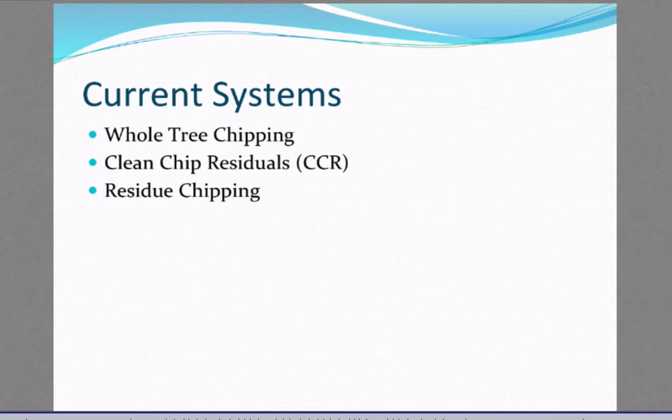For those that are in the forestry end of things, this is going to be a lot of review, but this is kind of what I thought we could review on and discuss where we might go from here. So first I wanted to talk about current systems, and there's three general areas that we think about as we produce biomass, and those three systems are what we call whole tree chipping, or at least what I call whole tree chipping. There's this area of clean chip residuals, which some people call CCR, and then there's the area of residue chipping. So we'll kind of go through each one of those.

Whole tree chipping, you know, it's been around for a long time. I want to say since the early 70s, there's been various opportunities of whole tree chipping out there. Most of them are large independent operations. Most of the time they're dealing with small diameter material. They were originally used for land clearing, and then the diameter was up and down depending on what the material started out as. But now they've kind of progressed to where, especially as it relates to biomass, they're small diameter material. They're usually doing some kind of understory clearing.

They can be used for land clearing. I was recently down in Florida, and there was a lot of land conversion going over to farming that they were doing some land clearing on, and then you can get larger diameters. But most of the time what we're talking about is understory removal, where it's pretty small diameter material.

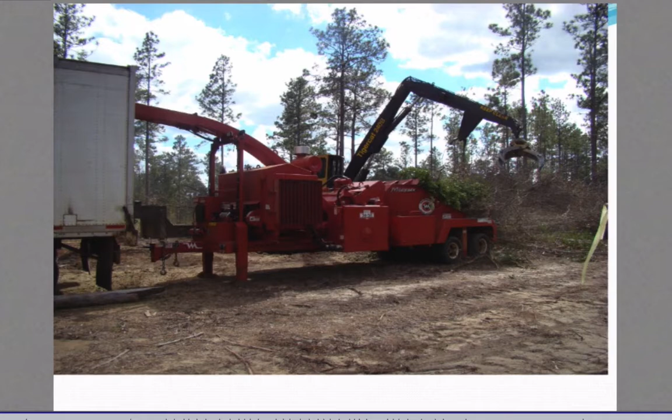Of course, there's a chipper involved, anywhere from probably 450 up to about 800 horsepower. Some of them are fed by a separate loader, which you see in the back on this one. Some of them will have a loader attached. There's lots of manufacturers out there, Morbark, Bandit, Peterson, several different manufacturers out there.

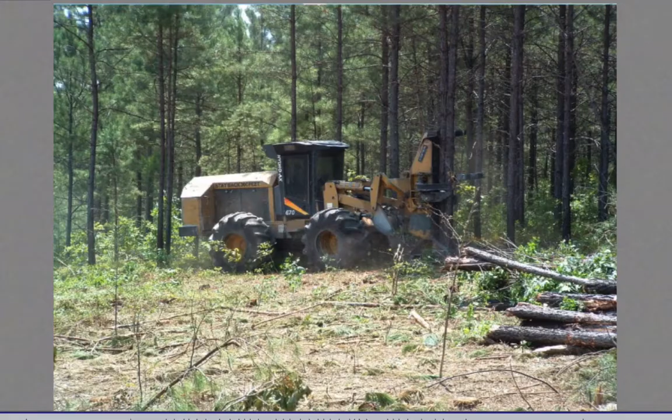Typically, the material is harvested with a wheeled feller buncher, with a saw head or a shear head on it. Very common machinery. It's been around for a long time. No surprises here. Very proven system. But a wheeled feller buncher, harvesting anywhere from 10 to 15 loads a day.

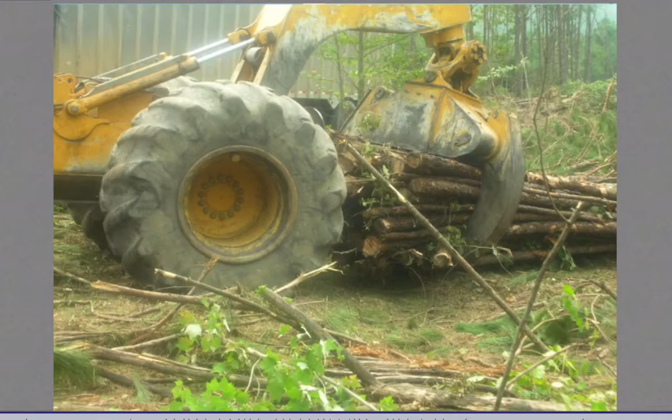Brought to the chipper via a wheeled skidder, and in terms of understory removal, you can kind of see diameters in there, anywhere from 2 to 3 inches in diameter up to about 6 or 8. Once in a while there may be a big tree for whatever reason, but lots of small stems, and then they're feeding them entirely into the chipper. In this case, this is the same operation. You can see the loader feeds them. A lot of variability in the material.

You see he's blowing it into the van. For those who may not be familiar, we call these dirty chips. It's not the fact that there is some dirt in them, only a really small quantity. They're dirty chips from the standpoint that they have not only wood, but bark, needles, leaves, whatever else.

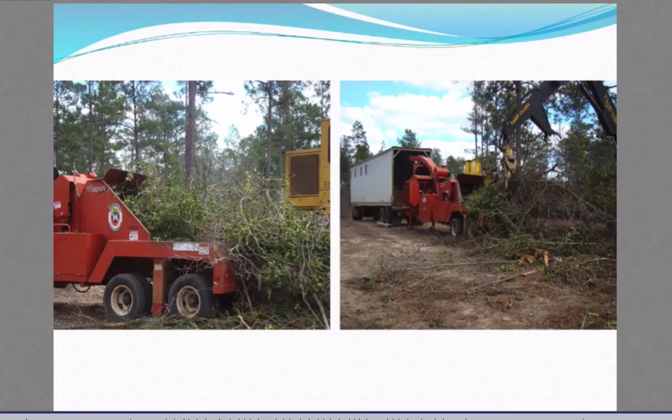As you can see from the pictures I have on right now, it can be pretty small diameter and ratty stuff, but if all it's going to do is be used for biomass, especially right now where it's just being burned, it doesn't matter what the makeup of the material is. Those are the majority of the systems out there right now. The pictures I just showed you were from various fuel operations I've seen in most of the southern states. And again, wheeled loader, regular size, conventional skidder being fed into a chipper.

We do have a project here, most of the way through right now, where we put together a dedicated system specifically to handle a large number of small stems. We consider these to be loblolly pine fuel plantations, energy plantations, grown on a 9 to 12 year rotation. Lots of stems per acre. In this case, there was about 600, but we can foresee 800 to 1,000. We put together this system.

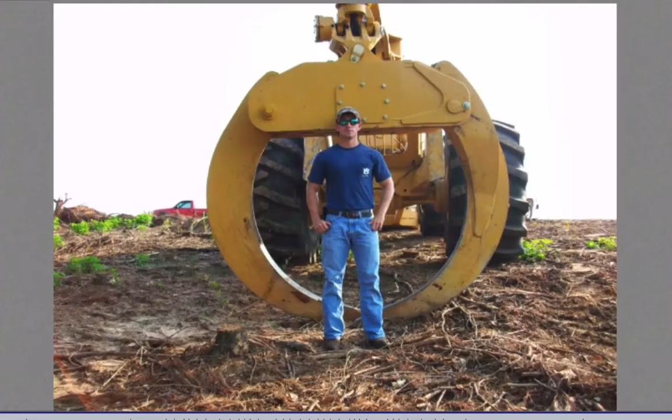It was a track machine, as you can see, a boom type machine. So instead of driving all over the stand like a wheeled machine would have to, this would reach to the different trees. The high production felling head was a shear head, capable of handling up to about 15 stems, though we found some difficulty in getting that many. Very high production system. We mated it with a fairly large size Tiger Cat skidder. This was a 630 with quite a large grapple on the back to handle the multitude of small diameter stems that would be piled by that feller buncher.

The difference between this system and the wheeled systems is that most of the wheeled systems currently out there are only handling about 10 to 14 loads a day, whereas this system, as we checked the productivity of it, if they can get the trucking to do what it's supposed to do, with just a feller buncher and one skidder, could probably produce about 20 loads a day. So it's a much more productive system, with the idea that you'd be clear cutting small diameter stems. The rest of the system is that it was put into a chipper. In this case, we were producing clean chips. But the idea behind the system originally was that it would be for producing fuel or dirty chips for the energy market.

Bottom line is all those were whole tree chipping systems. Again, they're generally large independent operations. Small diameter wood, land clearing, and understory removal. You're going to get wood, depending on if it's clean chips or dirty chips. You're looking at something that's going to be heavy to wood, probably 80% plus. And you're going to have that 7 to 9, 10% bark, and about 10% is going to be needles, foliage, anything like that. So that's whole tree chipping.

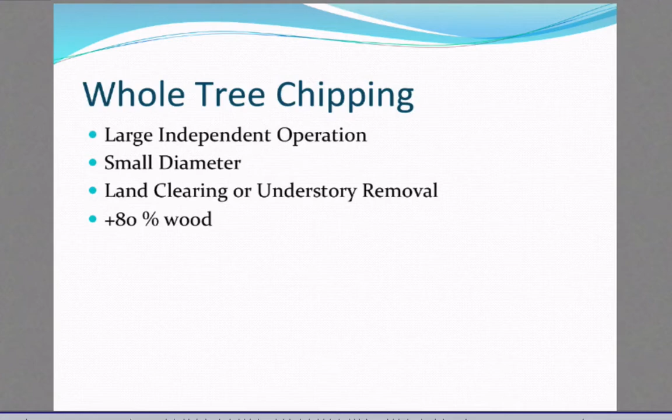The second category that I think about when I talk about biomass and fuels is clean chip residuals. It's important to understand that this is a byproduct from a clean chipping operation. So if you don't have clean chipping, you don't have any of this material, and it's almost always going to be reprocessed through a grinder, which means the quality of the actual pieces of the material is probably not going to be as good as you get from a chipper.

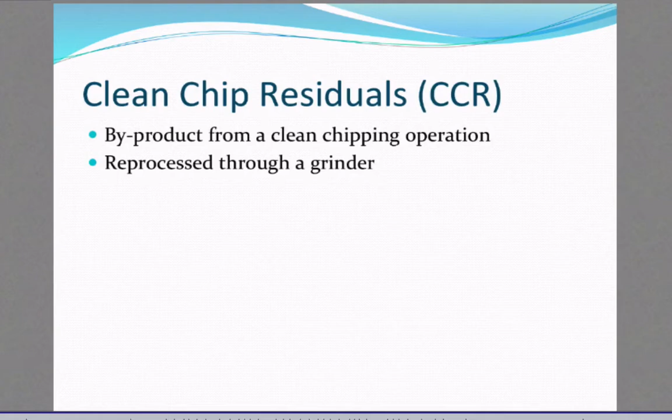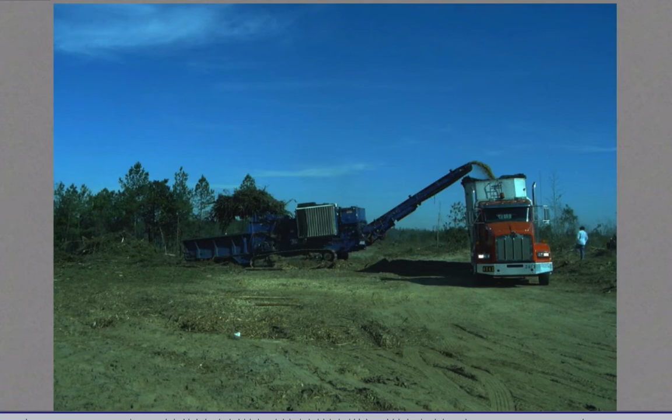The contrast isn't very good, but just in front of that front-end loader, you can see the material all kind of piled up. And then what will happen is he will grab that with his forks on the front of that front-end loader, and you can kind of see this one. He's on the back side of the machine. He's about to dump a large bucket full into the grinder, which then processes the material through and into the truck for delivery, again to the biomass plant.

The quality of this material is quite variable. It's obviously less wood and much more needles and bark. Dirt can be a problem. And that really falls back on time of the season, and also who the operator is. Some operators are very good. They make sure they don't pick stuff right off the ground. They make sure they don't push up too much stuff off the ground.

But I've heard a lot of different stories on this material. I've heard of people showing up with loads as much as 15 and 20% dirt in the material. And that's obviously going to be a serious problem down the road from these operations. Just to let you know, we're not the only ones looking at this material.

There's a nursery market. The horticulture department here has done a lot of studies on using this material to grow both annuals and perennials in the nursery business. Their source of material, which was peat out of Canada, transportation cost, the availability of it is becoming an issue. And they started doing a lot of studies here, growing material in it, and they found it extremely favorable.

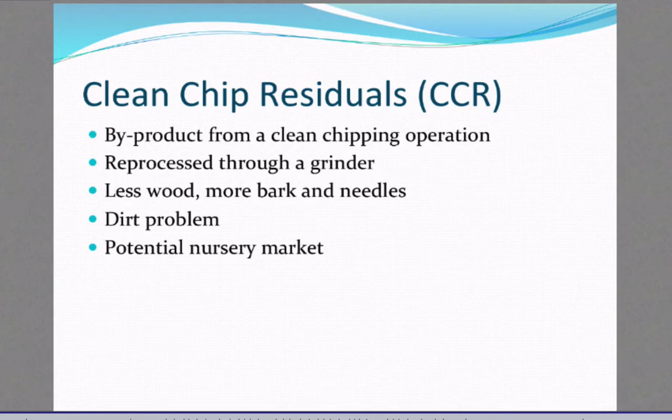The disconnect there is they don't need that much of it, and we're still kind of working through the situation on how to take it live or how to make it operational. These guys want 1 load a week, and we have operations that will produce 8 to 10 loads a day. But again, it's all ground, so you get a lot of variability in the material, not as much wood, much more needles and bark, and that's going to impact the ability to process the stuff.

The third category you hear a lot about is what I call residue chipping, and that's the byproduct of roundwood harvesting. Everyone's been past a logging job and seen that big pile of tops and limbs, and some loggers do a pretty good job carrying it back to the woods just to spread it. Some carry it back to the woods to put it in the skid trail to reduce compaction and fill in wet spots and things like that.

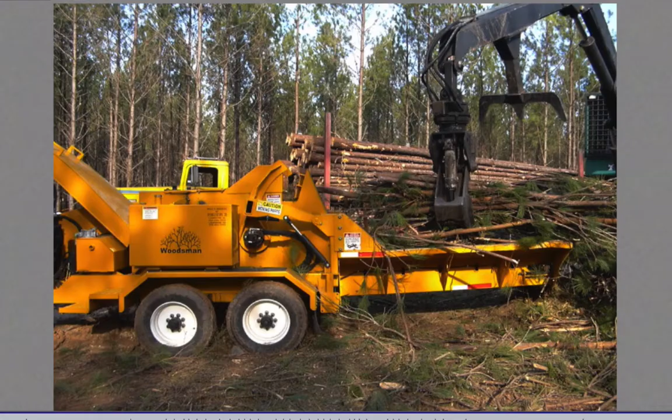But the important thing about residue chipping is that you understand that it is a byproduct of harvesting. So you've got to have those operations before you're going to get any of this material. It's typically low volume. An example of that is this was an operation not far from here. He used 1 loader and he'd fill a truck up, as you can see in the back, and he'd just take the tops and limbs and things like that coming off that material and process them through the chipper.

Small chipper, maybe 325 horsepower; this operation was only generating about 1.5 loads per day on 8 loads of roundwood. So not a lot of material. And again, he used it mostly to clean the site. You can see this was a thinning operation.

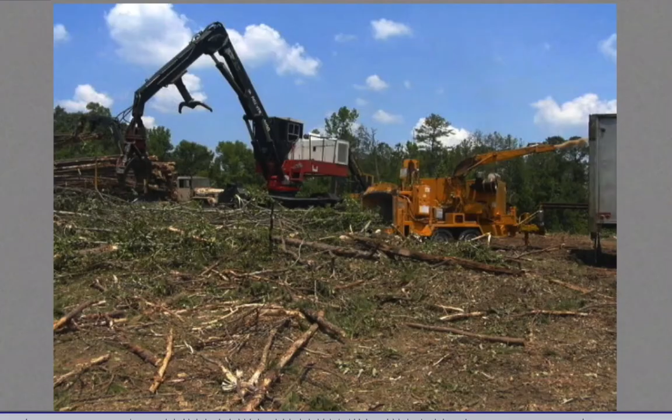Another operation we had nearby, he actually set it up as a separate entity. If you look on the left of the picture, you can see the loaded truck, and just behind the loaded truck you can barely see the loader there. He actually had a deck where he did all the processing of his roundwood on one deck, and then he pulled the material over to this operation, and he was getting 3 to 4 loads a day of residue chips. So he was getting about 16 loads of roundwood a day. So it was about a 1-to-4 ratio on this job.

So the bottom line is it's not a lot of volume, but this is the material that Steve Taylor likes to call the low-hanging fruit, because it's already on the deck, it's available. It does have to be processed. It's not a highly productive operation, but there's still a lot of it out there, and probably where we'll see most of our material come from, or at least the first place where most of the material gets utilized.

Again, it's typically low-volume operations. You can have dirt problems if it's wet out, and depending on how much it gets pushed around. Again, that's going to fall back on the operator. You're going to see a lot of variation.

Typically, we did some sampling here on a study that we're doing. We found about 75% wood, and the rest was sort of evenly divided between bark and twigs and needles and things like that. But it can vary quite a bit. We had some with as low as 60% wood, where there was a lot more needle material.

We've had stuff as high as 80 and 85% wood, when it was just some pretty good top wood off of hardwood jobs that went in. So there is a lot of variability in this material. I guess that's the take-home message on that.

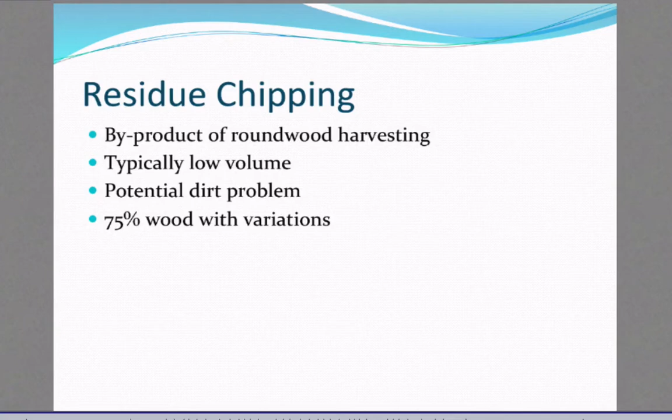Short rotation woody crops, which of course is where we're looking at right now, and what this study is going to mostly concentrate around. It's still very much developing. There's a lack of machines. Everything that I've shown you before are tried and tested machines. There's lots of wheeled feller bunchers and skidders.

There's half a dozen chipper manufacturers. Chippers are being fed by loaders. There's several manufacturers out there. There's all kinds of history out there. We have good history on productivity rates, on cost, on operation cost, repair rates, all that other stuff. The short rotation woody crop end is quite new, and there is definitely a lack of machines.

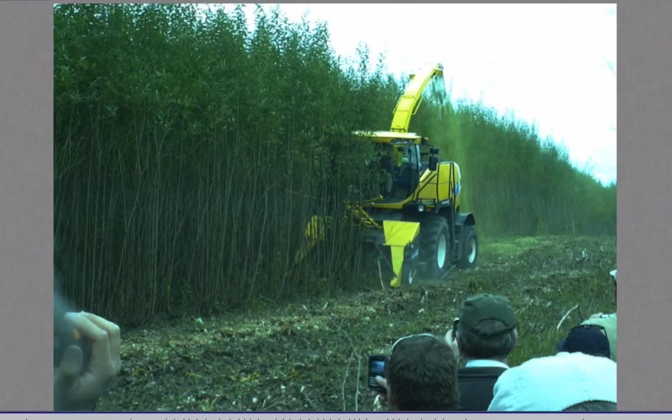As a matter of fact, as I know it as we stand now, there's only a few machines that are out there and available. One of those is the New Holland harvester. This, in the example you see here, was on a willow plantation outside of Syracuse, New York. New Holland basically took a silage harvester and put a little more beefed up harvesting head on the front of it. You can see it's a fairly decent sized machine.

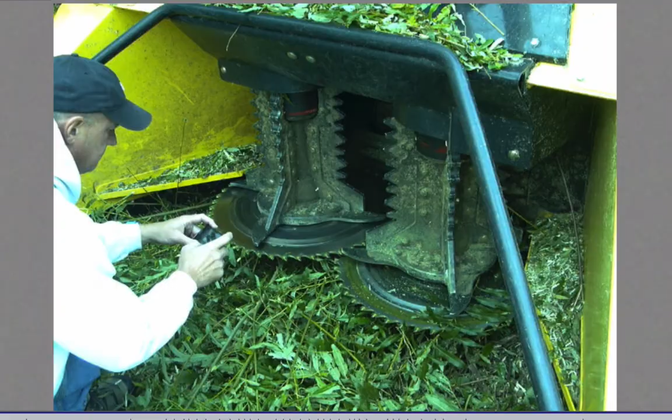It's not a cheap machine either, and those issues are going to come into play in just a minute here. You can see a little more design on the head. It has a pair of saws that actually cut the material off. In this case it was willow, so it's a nice clean cut, and it then forces the material into the chipping.

I should go back and say this was a sort of a research demo example, and you can see he's just blowing the material onto the ground. Typically this would be blown into some kind of bin and brought out to be reloaded into trucks. But this being a research example, they were just kind of showing us the machine. They weren't going through that phase of it.

So you can see quite a beefed up head. Did a really good job. He was able to go right down the row. Again, this was a willow plantation in Syracuse. You can see fairly small diameters. Most of it was probably less than 2 inches in diameter. Multiple stems, 5 to 8 stems in many cases.

Not quite what we're looking at. As I understand it, I haven't been able to get some of the folks to tell me exactly what we're looking at, but I think we're looking at more like 3 to 5 stems, and hopefully in the 2 to 3, maybe 4-inch range if we're looking at this eucalyptus.

We put some of that in the ground, and we're waiting to see how it comes out, and if we're going to be able to have something to try some of these machines on. If not, whatever we decide to put together, we may have to go on the road and test.

An important aspect of this machine that needs to be noted is the nice clean stools that are left by the saws, and that's a very important consideration with this short rotation material. If you don't have good clean stools, you're not going to get the regeneration back that you want.

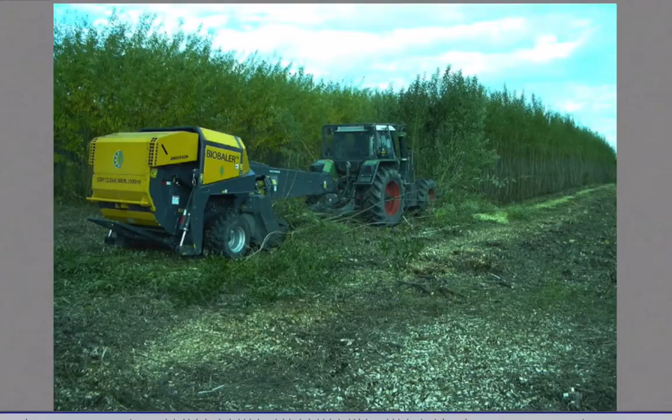There's another machine that was tested at the same site, and this was the bio baler, and there's been several testings of this. This was the willow test up in Syracuse, New York, on the same location. The Forest Service down here at Auburn has tested this down in Florida on various material, including, I believe, some eucalyptus. And you can see same kind of deal.

He knocks it down, and then the bio baler actually cuts the material and grinds it up, puts it into a very nice little bale that's easily transported from the site. That's one big advantage of the bio baler, that it puts it into a very handy transportation unit. These are about 1,000-pound bales, but you can see the material is somewhat stringy, so it's going to have to be reprocessed.

The real downside to the bio baler is what it does to the stool, and you can see it tears it up really, really poorly. And that's a real issue. Again, I have not been able to verify this going back to this site since it was up in New York, but in talking with a lot of people on site that are familiar with coppice material, this is not going to regenerate very well, and that's a problem with the bio baler.

So it kind of goes back to the idea we need something that's going to make a real nice clean cut so that we get good coppice from whatever machine that we want to deal with. So the idea behind short rotation woody crops is that it's still developing. There's not many machines out there. The situation that we have to think about is it's kind of a two-edged sword.

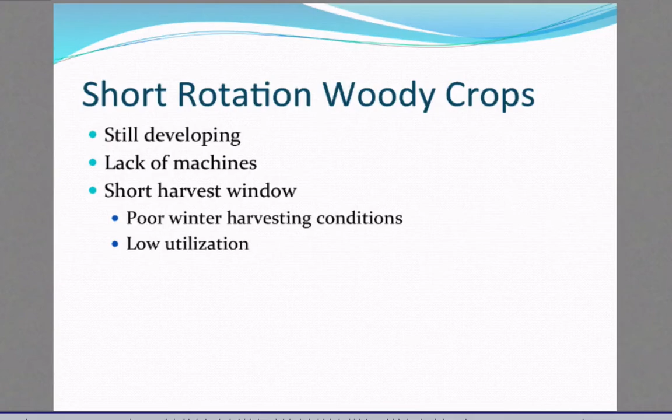So the machines that we currently see, namely the New Holland one, which probably has the most study time on it, and in terms of a product is probably the most advantageous out there, has a serious cost issue. Some of the other machines that maybe you'll get other uses out of aren't producing the product that we want. An example of that is the Fecon machine. This has been tested. This was a test done by Joe Roise at NC State.

In this application, it was being used just to do fire hazard reduction, places where they can't burn. They looked at using this machine to go through and process all this cellulosic material, blowing it into the van behind it. That van was then, I'll show you in the next slide, brought out and dumped. But again, it's back to that grinding head.

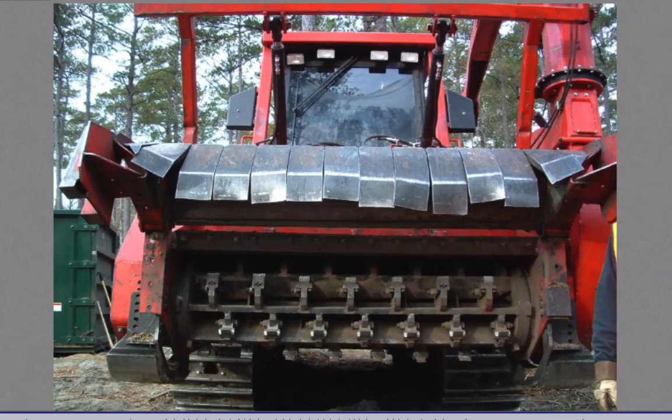Now in the application that you see here, where it was used just to process material for fire hazard reduction, the grinding head isn't a problem because you're not worried about any kind of reproduction. But it's a good sized head, and you can see it takes about an 8-foot swath. It's a track machine, so you don't have the flotation issues that you might have with a wheel machine.

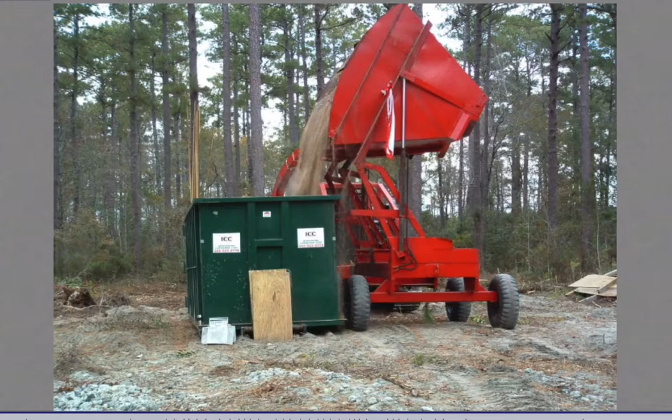All that's real good. It brings the material out and dumps it, in this case into a bin. It was kind of stringy material, which would probably have to be reprocessed at the plant, but it's still a chip material that can be handled and transported by our current technology.

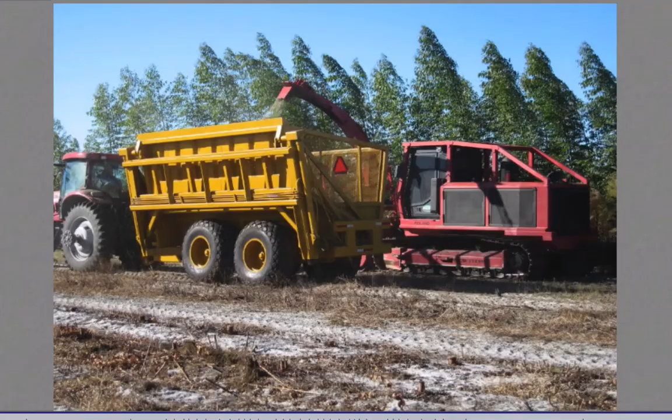This was an example of it being tested. I believe the Forest Service was down in Florida, where they were grinding up some eucalyptus plantations down there. Again, the flotation situation you can see is, of course this is a dry sand, but even if it were to be wet, you got a track machine that's going to do pretty well. You got a wide tire on the transport system that brings it out roadside.

So a summary of the current technology that we know that's out there as it relates to short rotation woody crops is we're looking at what is defined as expensive machines. The New Holland machine was over a $400,000 piece of machine that, as it stands, is going to see low utilization if you're only looking at about a 4-month harvest window. And the last thing to think about all the machines that I showed you as they related to short rotation woody crops is they were all doing some kind of chipping and grinding of the material.

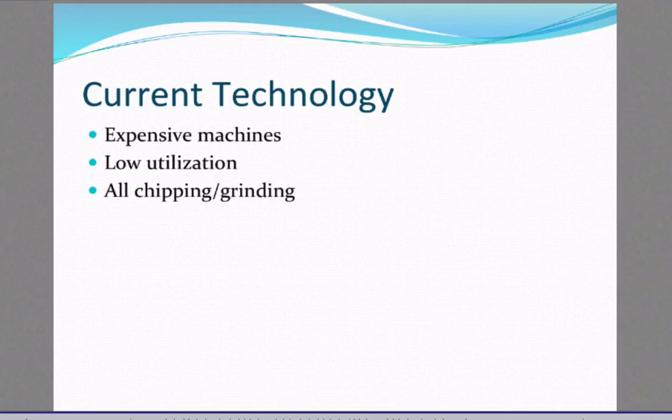So that had us thinking about where could we go with this. At some point in time when we get maybe some of our eucalyptus or poplars up to snuff, we can bring some of these machines down, do some production studies, do some cost analysis, as soon as we get those plantations together. But that kind of says, where can we go from here? And this is my idea of where I think maybe the IBSS research can head.

And that's in the idea of some kind of new felling head that I see mounted on a conventional feller buncher. We have very tried and tested feller bunchers out there, wide tires on them, so good flotation. Cost of them is not outrageous because they've already been built. We're not trying to reinvent the wheel. They can be used for other things, and that's very important. But if we can come up with some kind of felling head that can be mounted on a conventional wheel-type feller buncher, I think that we can reduce a lot of cost and give us a lot of flexibility.

The idea being that we could cut the material and pile it in some form or fashion. That's still what we're working on. That way, it could be skidded or forwarded out to a landing where it could be further processed. My thought process behind this is, again, the current technology you saw was grinding or chipping the material, and what a new felling head that just cuts and piles the material would allow us to do is give us the opportunity for transpirational drying, which could be quite beneficial.

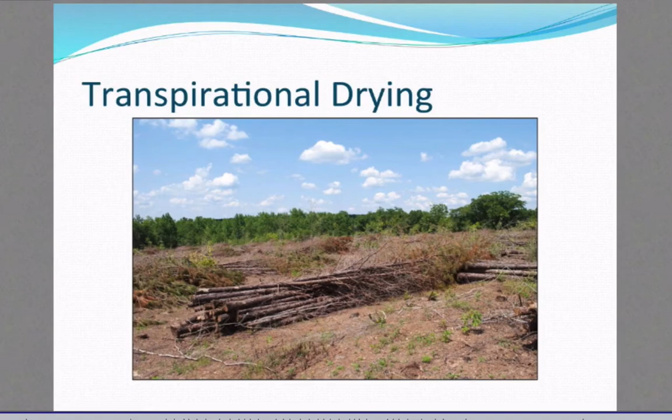On a little DOE project down here, the Forest Service completed a transpirational drying study. It was on a site down in South Alabama, about a 12 to 15-year-old stand. I'm not sure of the date of that, but what they did was they cut material. It was felled, laid down on the ground. They took aside 20 trees. They weighed them at 0, 3, and 6 weeks. They cut some discs from various trees, a destructive sample to get the moisture content. They also did a final chipper analysis at harvest by sampling from the material that was on the ground. They sampled 17 different loads.

What you can see there is the graph of what the drying looked like. They only sampled a few trees, and they assumed that everything started at that 56% moisture content. But you can see in 3 weeks and then at 6 weeks, moisture content went from above 55 down to 40 and then dropped all the way to 35. That was on the disc samples that they took and the weight of the trees.

And then what they did was they actually sampled the chip van after the material was processed. And you can see in the woods they got sample weights, sample moisture contents of down around 35%. When they sampled off the chips that were blown in the back of the van, it was more like 40%.

We actually did a similar study with bundles a couple of years ago, and we kind of learned the same thing: you can't just weigh the trees and assume moisture content is dropping. There's also mass loss. So bottom line, you have an opportunity for about a 10% moisture loss over 6 weeks. And our people in the woods that are doing our processing, our conversion folks, tell us that moisture content loss is huge and can be very beneficial.

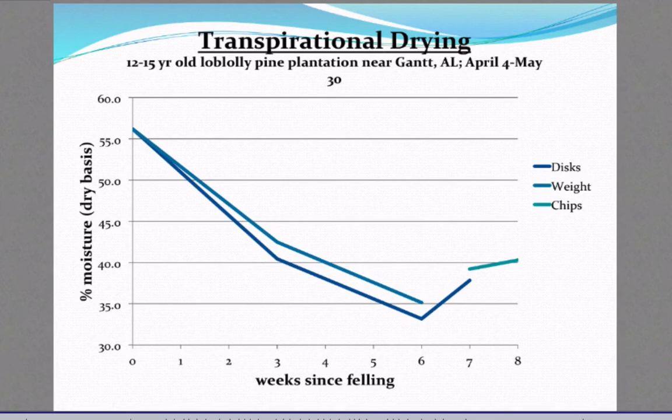If we could develop a machine that could maybe leave the trees whole, and we have at least the consideration of the transpirational dry, we might be able to see some good benefits from that. So again, I'm kind of winding down here. This is where I thought we could head, and I'd love to hear from some of the other participants.

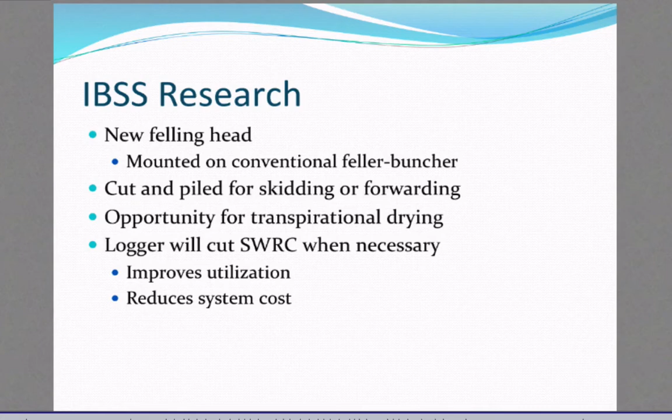The idea behind a new felling head that can be mounted on a conventional feller buncher. It would reduce a lot of costs. Instead of putting together a dedicated new harvester at $400,000 like the New Holland is, if we could develop some kind of harvesting head, $75,000 to $100,000, that could be mounted on a conventional feller buncher, you could improve utilization.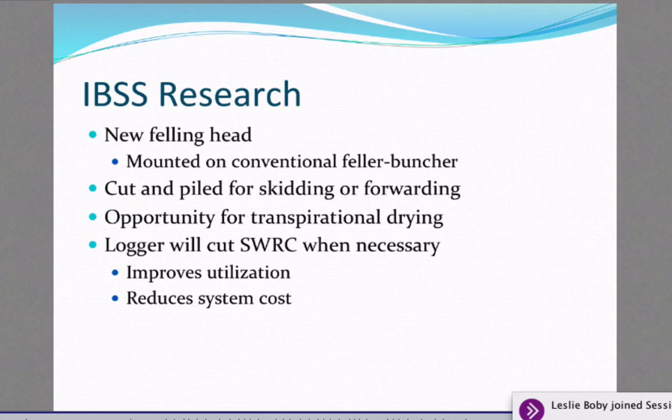You could have a logger who cuts roundwood, cuts for a conventional job for 8 months of the year, and then switches over and cuts these short rotation crops during the winter months. So he's going to get year-round utilization of the system, which is going to be real important to reducing those system costs. Again, he could take his feller buncher and skidder and do roundwood for 8 months, then go on short rotation.

Question marks of whether we can skid or forward or how that would go, but cut the material, leave it on the ground, let it dry, or potentially harvest it green. But again, short rotation crops for several months, roundwood the rest of the months, improves utilization, hopefully lowers cost, reduces capital cost, and he's only buying a $75,000 head and not a whole system.

So let's see, I'm sorry, it just occurred to me that I haven't been watching my questions. What are the risks of transpirational drying, including fire hazard? Yes, and actually Matthew Smith did a good job. He actually had a landowner group conference feedback, and surprisingly, landowners were not that concerned with the fire hazard, though the folks in the woods were worried a little bit about it.

Yes, that is a problem, but I'm not worried so much about the fire hazard as I'm worried about 2 visits to a site. I mean, a lot can change in 6 weeks around here. What could be a high and dry site at one point, with the right rain or something like that, can become a pretty wet site. So, coming from the woods, we always have this going back and forth.

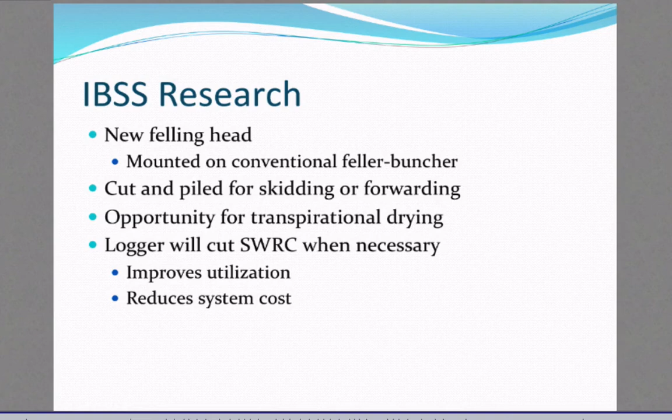So with that, I think that's it. I'm ready for questions. I know I kind of missed a couple as I was going along there. If anybody wants to jump in with a microphone, I'll turn mine off for a second here.

Sounds like that would be a good meeting for us all involved in logistics. Yeah, the New Holland machine also has been tested out west too. Thank you, Tim. I did not know the New Holland machine had gone out west. Yes, Steve, I think it's time that we as a group get together and discuss the direction we're going.

I'm also curious on how our plantations came out of the ground, in terms of are we going to have a place to test this material on our stuff, or we're not going to be far enough along and we're going to have to look at other testing sites. Namely, I think there's some sites out in Mississippi, on the Mississippi Delta, that we might be able to test it. But those are some of the logistics things that we have to figure out.

I have talked to Tim McDonald, and we've gone back and forth, and Matthew, and we've kicked around this harvesting head. Everybody has a little bit different idea. There are some definite challenges to developing this new harvesting head in terms of being able to cut the material and lay it on the ground and minimize the dirt and things like that. But it's the direction that I see this project going for the time being, with what we have to work with.

I mean, the New Holland machine's out there. At any point in time, I'm sure we could get one, bring it down here and test it if we can get some trees in the ground that would meet our criteria of what we see as short rotation woody crop looking like. I'm interested in coming up with something to solve some of these other challenges.